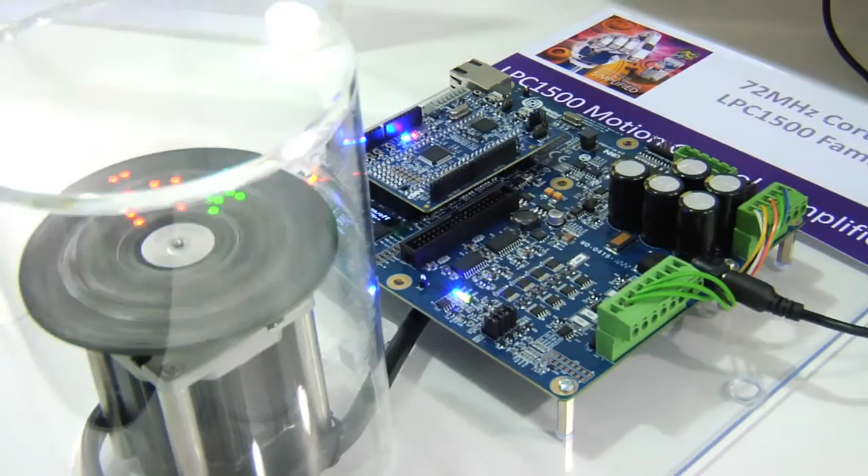We'd like to cover not just the features of the LPC1500, but Mahesh is going to cover some of the motor control work that he's been doing. So we've got a few demos, as you can see at the front. We have the board spinning with the NXP logo. So we have that version, and we also have this flywheel, both using the permanent magnet synchronous motor, but we also have a BLDC solution kit as well.

So the agenda for the presentation: quick introduction from my side. I'll touch on some of the key features on the part that make it specifically good for motor control. Mahesh will go into some more of the technical details, and then I'll cover some of the software and tools and the development platforms that we've got for motor control. Q&A at the end, but if you have any questions as we go through the presentation, just stop us. The more interactive it is, the better it is for us and for you, hopefully.

The 1500 has been designed with a feature set in mind that will drive multiple different motors simultaneously. The other thing Mahesh has created as well, we've got a GUI used to tune the motors. So every individual motor has a different resistance, inductance, so some issues there when it comes to tuning the motor. So Mahesh will talk a bit more about that.

Some of the customers that I've spoken to are in the consumer space, large home appliance, in the commercial space for HVAC, elevator, escalator control, and the heavy-duty industrial pumps and generators, so the AC induction type motors. But the feature set, we have 4 state configurable timer PWM blocks on there, so it means it can drive up to 28 PWMs. We have 2 12-channel, 12-bit ADCs on there, so 24 channels in total. So in total, we could, in theory, drive up to 4 motors simultaneously.

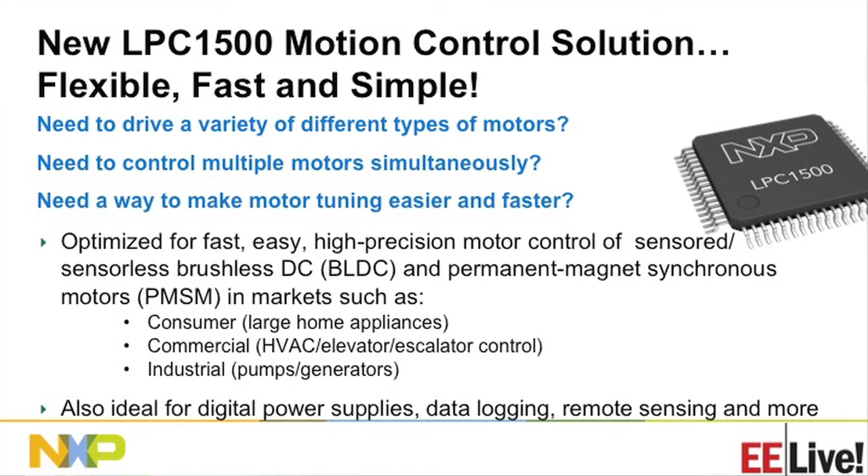So if I take an example of a permanent magnet, this type of motor here does have a QEI sensor in there, the quadrature encoder, I should say, which hooks directly into our QEI interface on the microcontroller. On the sensored side, we connect directly to the QEI. But if we're doing sensorless, we use the ADC and the PWMs. So the ADC can measure the currents in 2 of the phases, and you can determine the position, the direction, and the speed of the motor.

So the firmware, we have our own engineer-to-engineer website called LPCware. Up there, you'll find an app note explaining the brushless DC. There'll be example code that you can download, so it's all there. The key thing about BLDC is the SCTimer PWM block can drive that on its own, so you can actually shut down the CPU core, and the SCTimer will take care of that. So if power consumption is an issue, then you can shut the core down.

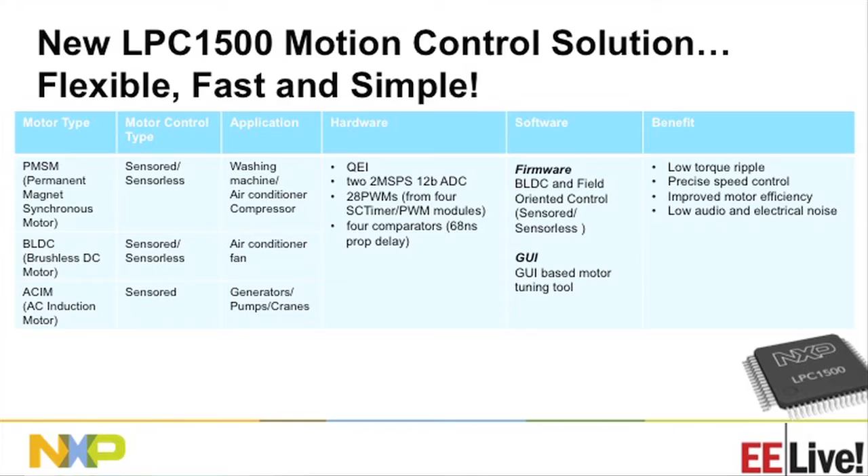But the key thing is the interaction between this SCTimer PWM block, the ADCs, the comparators. So this is all hardwired internally. So to create that control loop, it's very fast, efficient, and the interaction of the comparator and the PWM means if there's an overcurrent condition or an over temperature, then the comparators can shut down the PWMs in a safe way.

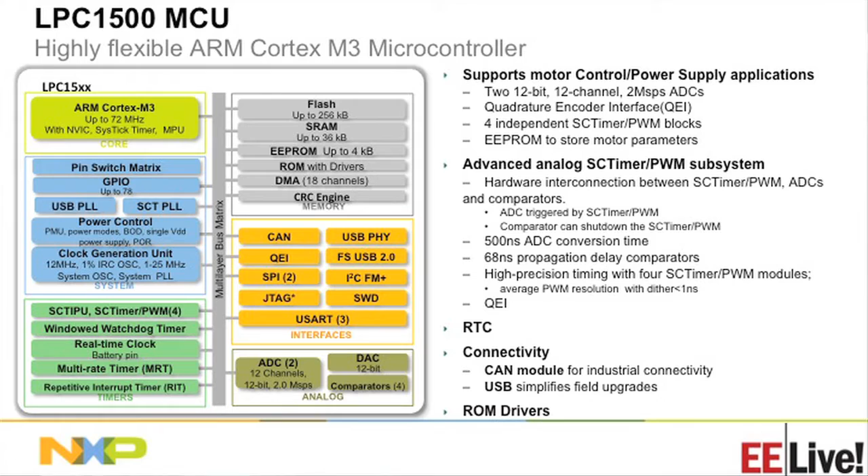But in addition, we do have the communication interfaces. We have CAN on there for the industrial side, and we also have USB if there's any in-field updates or for data logging. And we have all the standard serial communication there as well, SPIs, UARTs, I2Cs.

So one of the key features as well that I never touched on in the block diagram is the pin matrix or the switch matrix. And what it allows you to do is route any function internal to the part out to any pin on the device. So the benefits of this means that every function can get out, and you can use pretty much every pin on the device. There's a few exceptions like the USB and the I2C that are dedicated pads, but everything else can be routed out. So, for example, you can have your UART going to port 0, 2, or 3, or 4. It's up to you how you wish to program it.

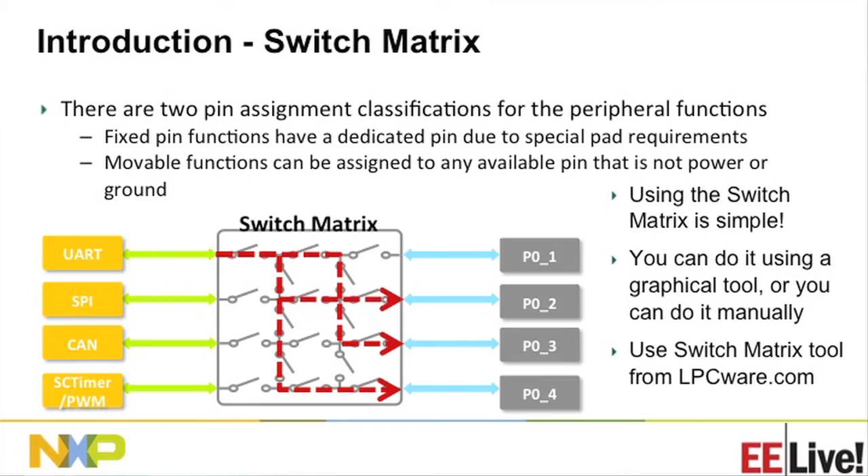So I mentioned the SCTimer PWM block being a specific block dedicated to the timing and the PWM generation. This block's unique to NXP, and what it does is it takes your standard timer, all the input capture, output compare, PWM generation, and you add on a state machine. So the state machine allows you to program various different types of waveforms. It gives you precise edge control over the PWMs. So if you want to create something that's non-standard, then the state machine allows you to do that.

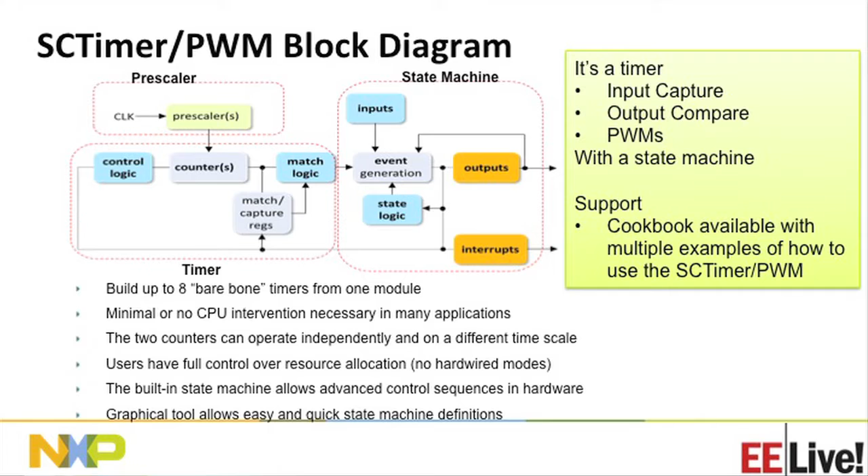We do provide a GUI tool. It's within our own development environment. It's called RedState, and it allows you to program the state machine in the way you specifically want it. But again, these blocks can either be one 32-bit timer or two 16-bit timers. So again, they're flexible. You can have them on two different time domains, and you can program them up and down. And depending on the states and events, you can create different types of waveforms.

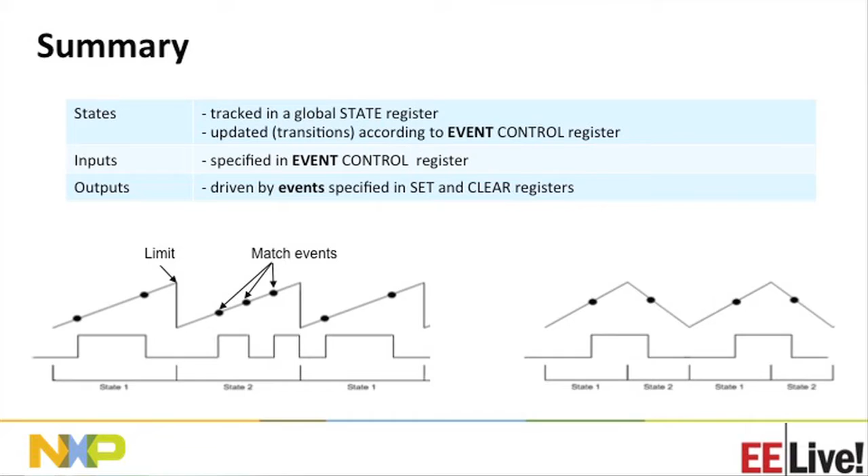Okay, so the ADCs on the device, there's two of them. So the thing to note is it's 2 megasamples per second, so it needs a 50 megahertz clock, but the core itself can run up to 72. So you have various different clock inputs that you can use to drive the ADCs. So it can be the internal oscillator, which runs up to 12 megahertz if you just want to run slow. You've got the system PLL, but obviously there's a limitation to 50 megahertz on the core if you use that. Again, you can use the USB PLL, but you're limited at 48 megahertz. Or you can use the SCT PLL and run it up to 50. And then, you can still have your core running up to 72 megahertz.

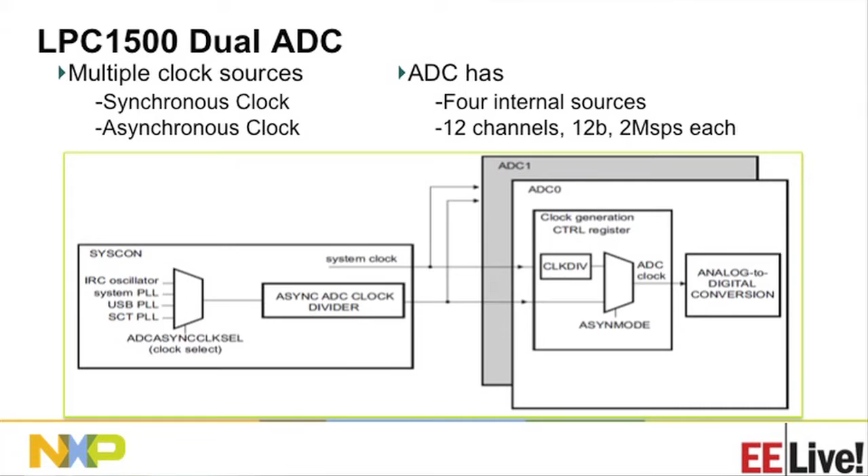So the other thing on the flexibility message about the 1500 is the comparators. So there's up to 7 different inputs that you can route to any of the comparators. Can be on either the positive or the negative inputs. Likewise, the temperature sensor is fed into the comparators as well. So again, if there's an error condition, then it can shut down. And there's 3 different propagation delay settings, depending on power consumption or the speed that you want of the comparator to flip. So that's programmable as well.

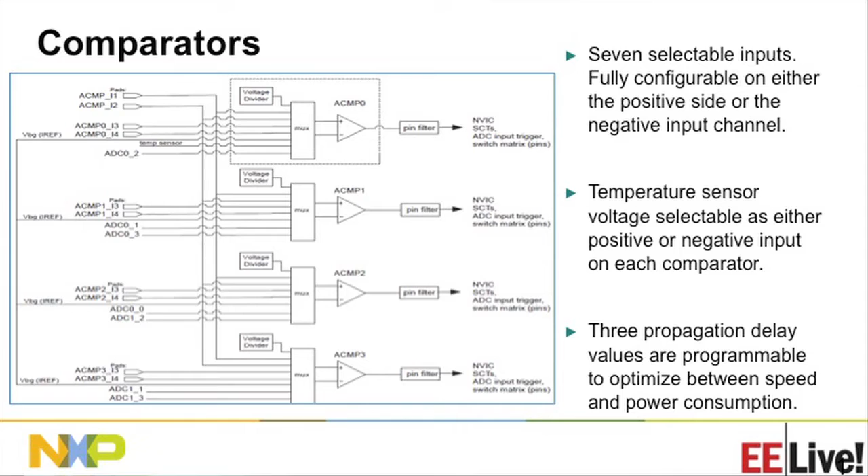The quadrature encoder interface, so depending on the number of output pulses and the phase difference between the pulses, you can determine the speed, the direction and the position of the motor. So that's fed directly on the board here, on the motor control board. The sensor is fed right into one of these blocks and then it's fed straight to the 1500. So the other thing is there's an index input as well, so if you want to reset the position of the sensor input, then you can do that. And then each of those pins is selectable, so you can route it out to any pin on the part.

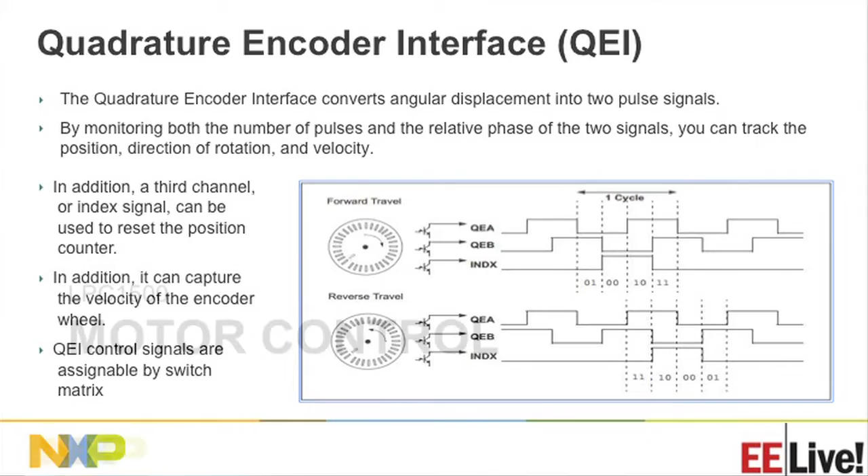Mahesh, I'll let you talk.

So Stephen talked about various peripherals available on this microcontroller for motor control application. One is SCTimer PWM block, which can have up to 28 PWM. 4 sets of independent PWM, minimum 6 each. So in that way you can control up to 4 motors.

There is a lot of interconnectivity between peripherals. There is a connectivity between comparator to SCTimer, ADC to SCTimer, and you have ADC also shutting down SCTimer PWM block. And that way you can control various motors like brushless DC motor, PMSM motor, AC induction motor. You can control definitely stepper motor and brushed motor. So you can control all of the motors using LPC1500.

One of the examples here is LPC1500 controlling 2 motors. One is a PMSM motor and the other one is brushless DC motor. In case of PMSM motor, here it has been shown that we are doing FOC on this motor and it's controlling 2 motors. In case of PMSM motor, the feedback is coming from the QEI.

The overcurrent protection is coming from the SCTimer PWM input processing unit, which can take input and shut down the PWM. And this SCTimer PWM IPU block can be controlled by SCTimer PWM block. So it can control when to take the input and when not to take the input. For example, there is an overshoot and you don't want to take the input. In that case, it can control that SCT IPU block.

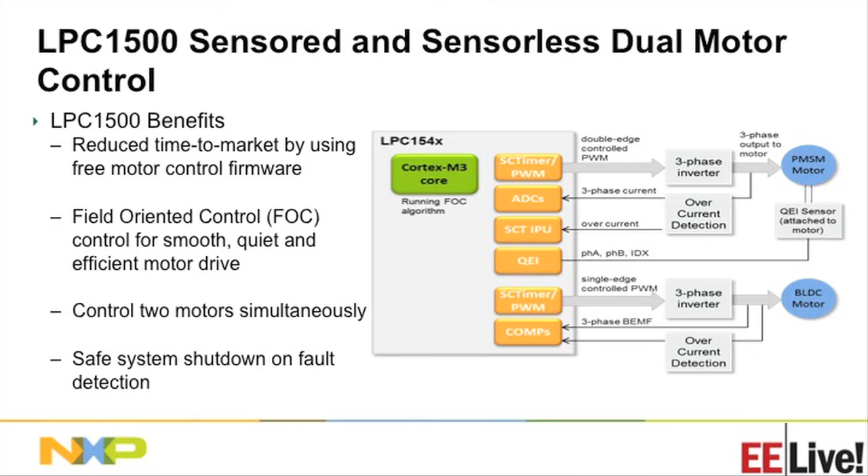The other thing is SCTimer PWM block can take the inputs directly from the pin or directly from other peripheral. In that way, you can directly connect Hall sensor to the input of SCTimer PWM block as an event. So there is an event control block in SCTimer PWM which decides which event needs to be taken and what to be done at a particular event. And this is a compressor control and the fan control, and the typical example is like an air conditioner. So it's the same as what I have shown in the previous slide.

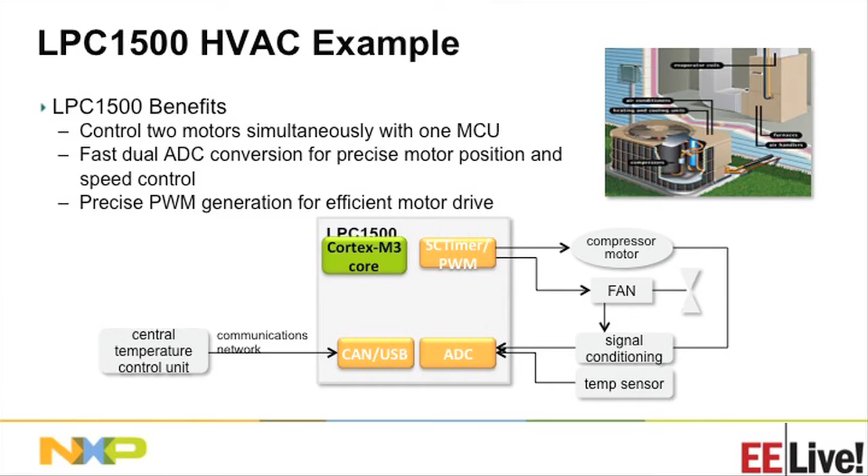So what are the key features in LPC1500 to control motor? For example, if you are doing FOC, you want to control ADC using PWM block so that you can sample ADC at a particular time. So there is a synchronization between ADC and PWM block. Each register has corresponding match reload register. So in PWM block you have match registers and you can generate duty cycle. There are corresponding match reload registers, so there is no glitch when you load the new value of PWM.

It has dual high speed ADCs, so it has 2 ADCs and each ADC is 2 megasamples per second. It has on-chip EEPROM, so you can store the parameters, any tuning parameter from the motor.

It has comparator and ADC, which can directly shut down the PWM block. So for example, in case of ADC, if there is a low threshold and high threshold, it can sense that, and it can shut down the PWM in case of over voltage and under voltage. And a comparator can be used to shut down PWM if there is overcurrent.

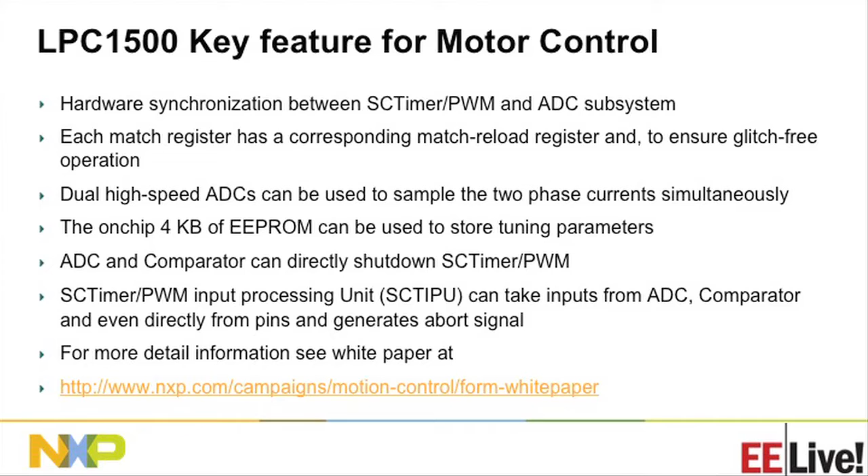The SCT IPU, which is an input processing unit for SCTimer PWM block, and you can control this block using SCTimer PWM block, and you decide whether I want a particular input or not, and it will generate a combined abort input. So for example, multiple inputs are coming, and you want to generate a single abort signal. This SCT IPU does that. You can go to this white paper link if you want more information on this.

So this shows the connectivity between various peripherals in LPC1500. So you can see there is one SCTimer PWM block, another SCTimer PWM block, another SCTimer PWM, and the last fourth SCTimer PWM block. So there are 4 independent SCTimer PWM blocks, each connected to SCTimer, and all timer blocks are also connected to the comparator output. So for example, if there is a fault condition, you can directly shut down the PWM from the comparator. That input can also go to SCTimer, and there are more inputs coming, so you can combine and shut down the PWM block.

This SCTimer PWM can trigger ADC here, and this block can trigger ADC, both of the ADCs independently, or can trigger both ADCs at the same time. So in that way, you can decide when you want to sample the signal. So the typical example could be FOC. If you are doing FOC in PMSM motor, and you want to sample one phase and the other phase at the same time, you can trigger using SCTimer PWM block.

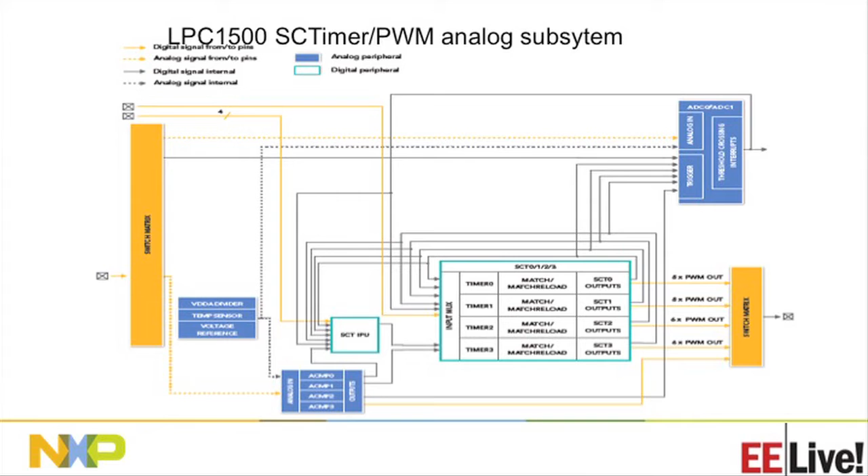And there are 4 blocks, and there are 2 large and 2 small blocks. The large block has up to 8 PWM each, and the small block has 6 PWM each. You have 28 PWM here, and you can control 4 motors using this LPC1500.

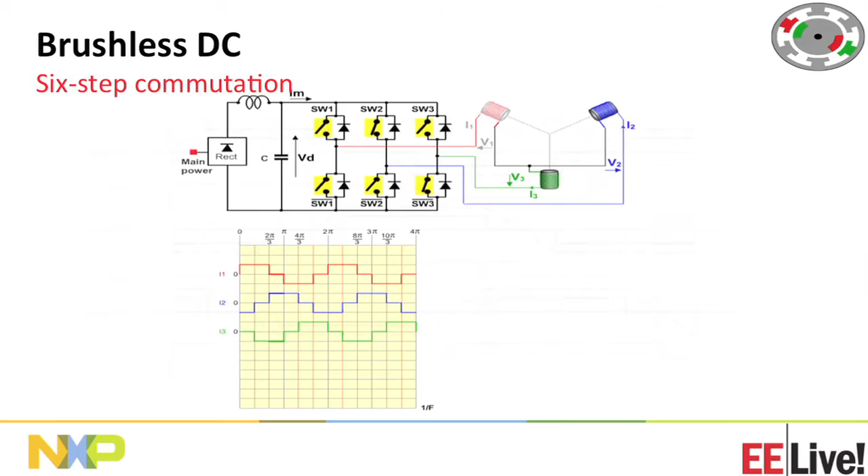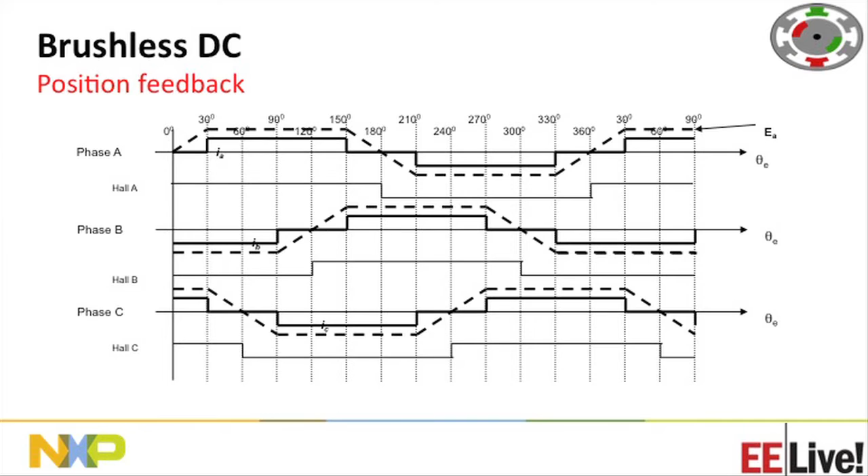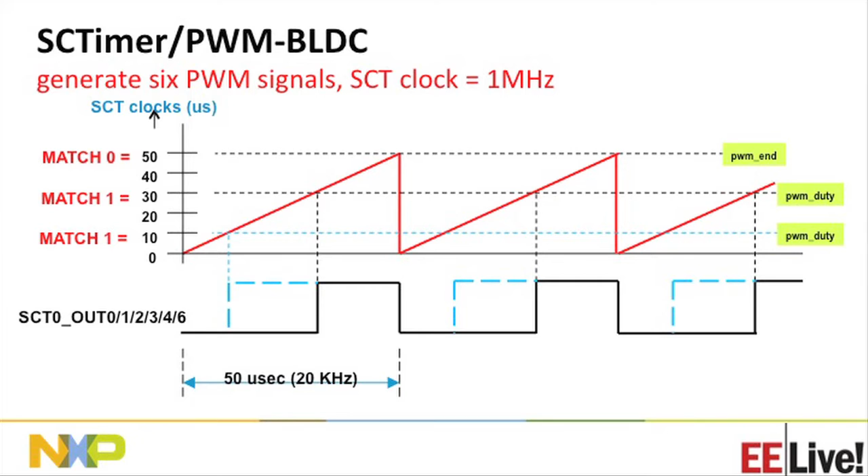And this one shows the SCTimer PWM block generating a PWM, and in this particular register match 0 is actually generating the period, and match 1 is generating the PWM width. So you have 6 phases, and at a time 2 transistors are conducting, but they are actually in PWM. Here you have PWM, you have PWM, then the other one, and that way you have 6 sequences. But each transistor will have a PWM at that time.

So the event is directly coming to the SCTimer PWM block without any software intervention, and it's changing the state continuously from one to the other. So this is totally happening in the hardware. So in this case, you can actually put the core in sleep. So this one shows in each phase you have a PWM duty cycle, which is generated by match 0 and match 1. The period is generated by match 0, and match 1 is generating the duty cycle.

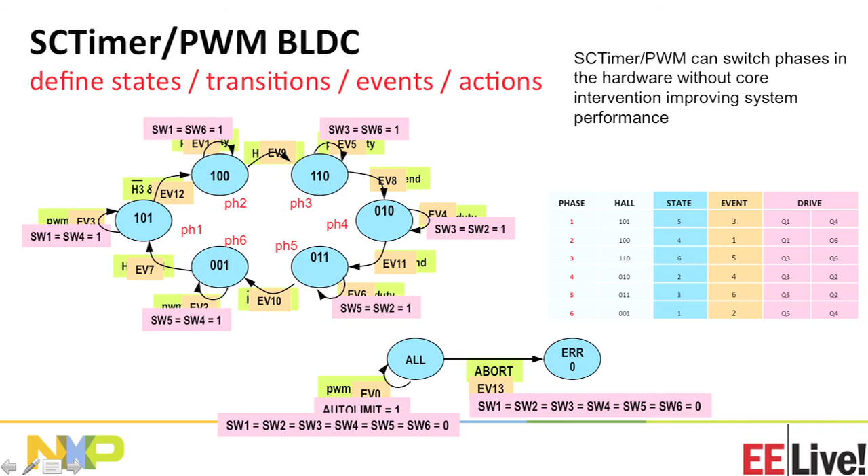So this one shows the abort condition as well. And you have comparator there, you have ADC input. So whenever there is a fault condition, it will shut down the PWM, because those inputs are directly connected to the SCTimer PWM input. So pins are connected, internally peripherals like ADC is connected, comparator is connected, SCT IPU is connected. So all those peripherals can shut down the PWM when required.

Now PMSM motor: this particular presentation is talking about the FOC, how to do FOC on PMSM motor using LPC1500. So LPC1500 has 2 ADCs. It has SCTimer PWM blocks. It has comparator, and they are also interconnected. One of the requirements of FOC is to sample phase current simultaneously. And there are other requirements for safety, like you need a comparator, you need some under voltage, over voltage control to shut down the PWM. All those are available in LPC1500.

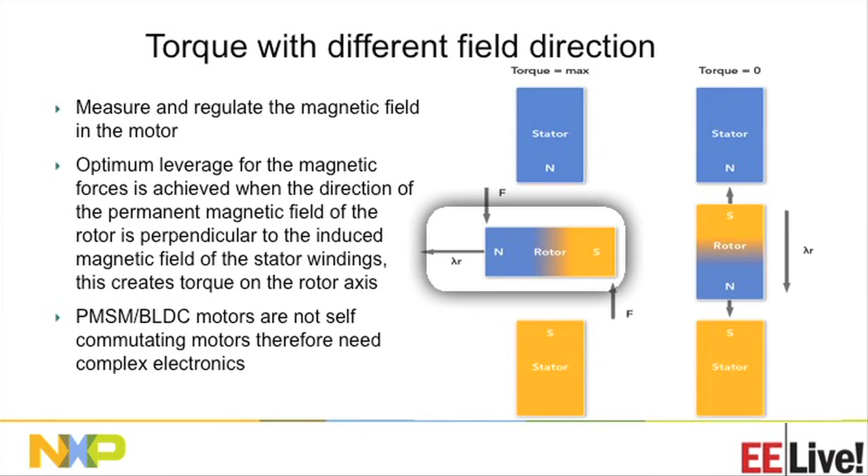And then you can have an arbitrary vector where you can say that, okay, at this particular moment the flux is actually in this direction, and you can have the direct and quadrature. You can have two components of the flux, and then you want to put the quadrature one maximum, and the parallel one 0. So parallel to rotor you want to make 0, and perpendicular you want to make maximum. So that is the principle of the FOC.

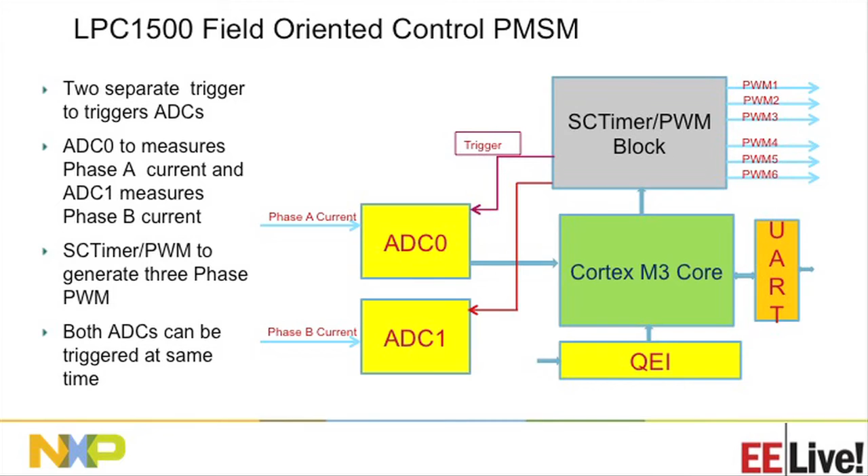And using LPC1500, you can sense the current, like phase A current or phase B current, simultaneously using ADC 0 and ADC 1. And from here, you know the current, then you can have Clarke and Park transformation. From there, you can have a space vector, and you can calculate the PWM values, and you can have SCTimer PWM programmed with the PWM values, and then you can generate PWM.

So ADC 0 you can use to measure the phase A current, and ADC 1 you can use to measure the phase B current. And based on that, you can control the quadrature current and quadrature flux and the direct flux. You want to always make the direct flux 0 and the quadrature flux maximum to produce maximum torque, because you have mu B sine theta from where you can generate the maximum torque.

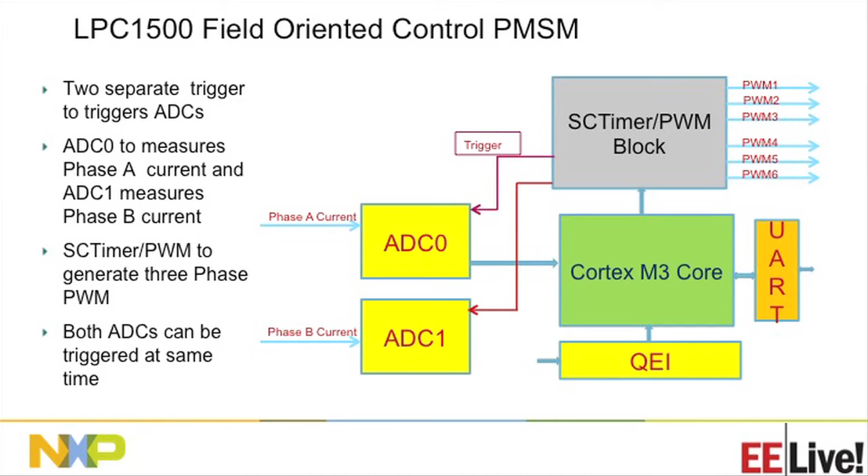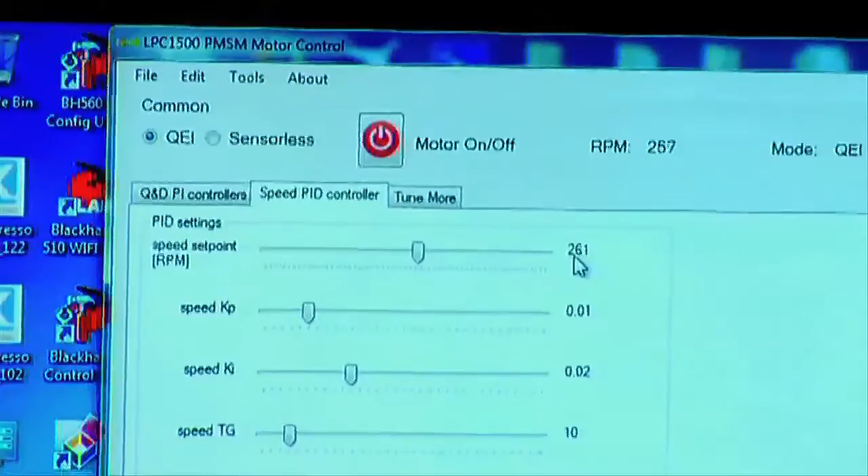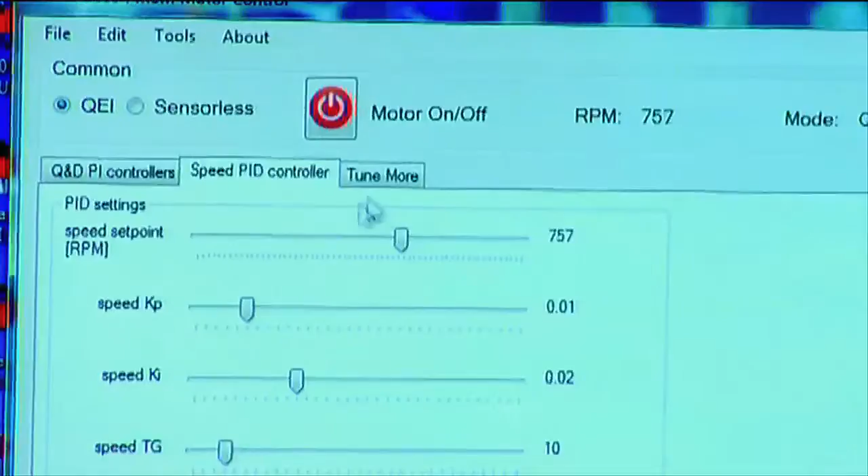I have a motor here, and this one is using FOC control, and you can see that this motor is rotating at a particular speed. We have a set speed here which is 261, and the RPM, which is the actual speed coming from the motor. So you have a QEI sensor here, the mode is QEI, and the RPM right now is 263, it's varying a little. You can change the speed. So the motor will rotate faster. Set speed and the actual speed, they are almost the same here.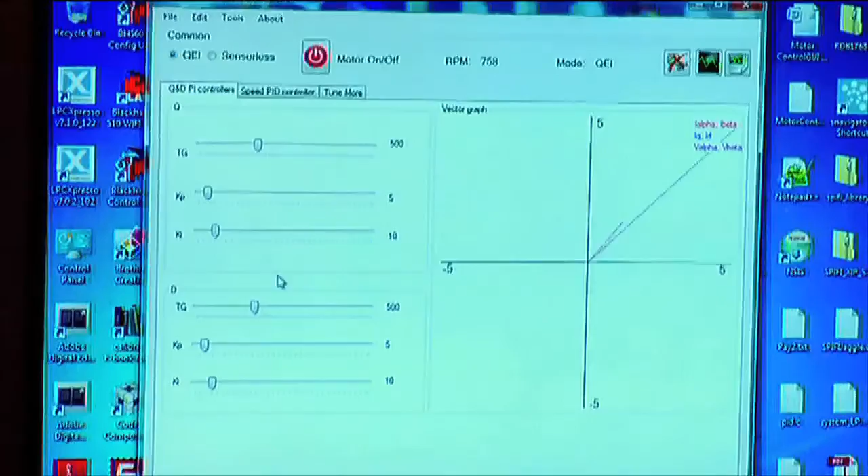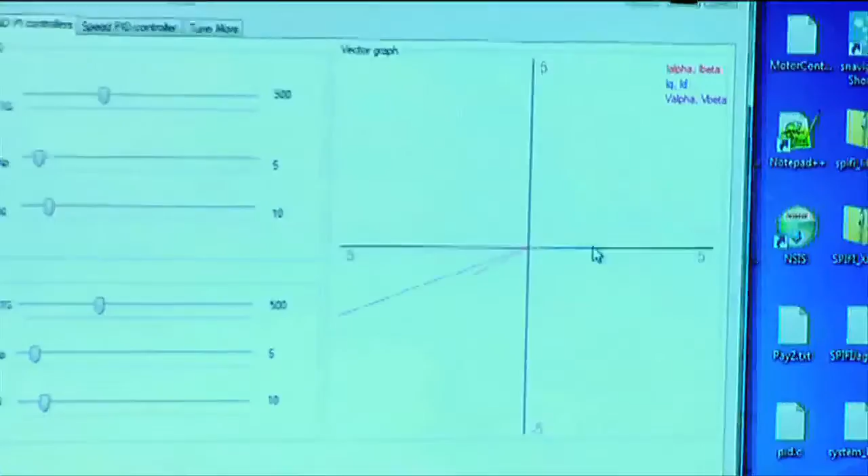You can tune the motor using Kp, Ki and TG value changes. The inner loop, which is the direct flux and the quadrature flux control, is actually done with all these 6 parameters, 3 for Q and 3 for D. This is the rotating vector, and this one is the constant vector, which is required in case of the FOC. So your motor is rotating, your flux is also rotating. So the calculations are very difficult when the motor goes fast. So you want to be in the rotor reference frame, and then calculate the PID loop.

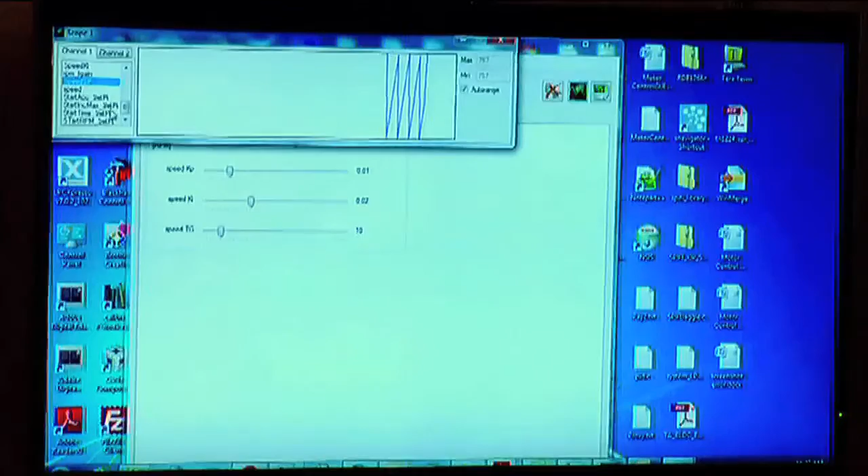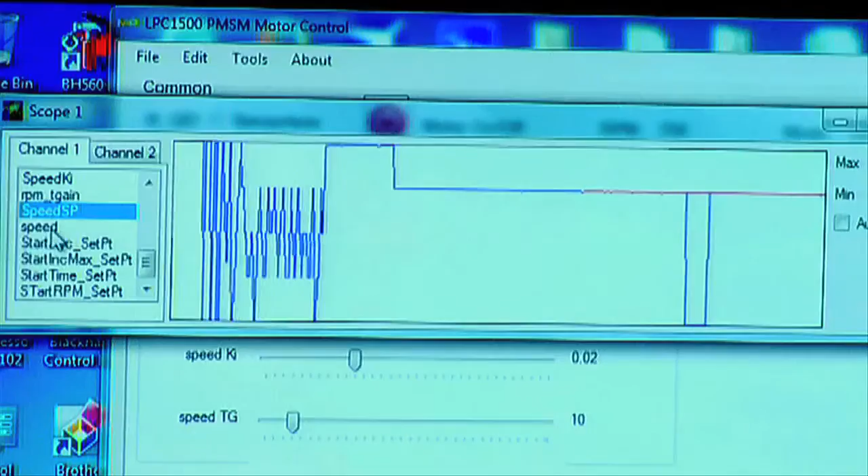So this particular GUI has some features. One of them is the oscilloscope feature, and it will show you the auto range. You can change auto range to a particular value. So you have a set speed and you have an actual speed, which is the speed the motor is running. I can change speed from here. So you see the blue is the set speed and the red is the actual speed, which is following the set speed. So this is one of the features of this GUI.

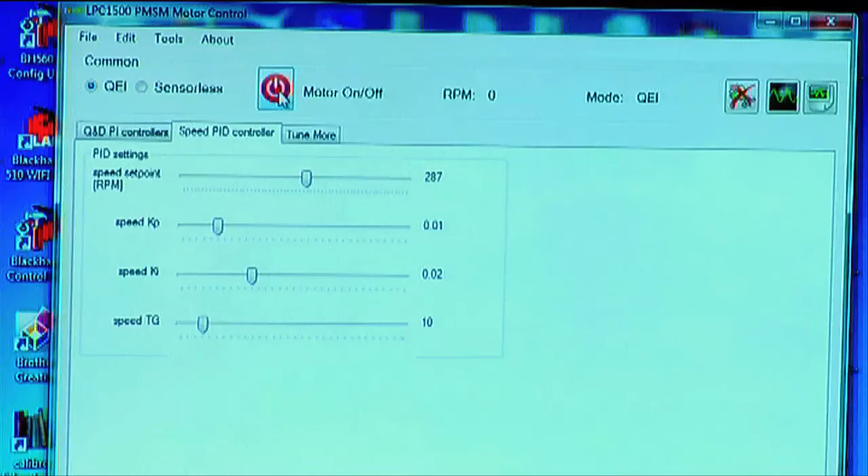You can tune various parameters from here. You can turn off the motor. So now I turn off the motor and it's off. It turned on.

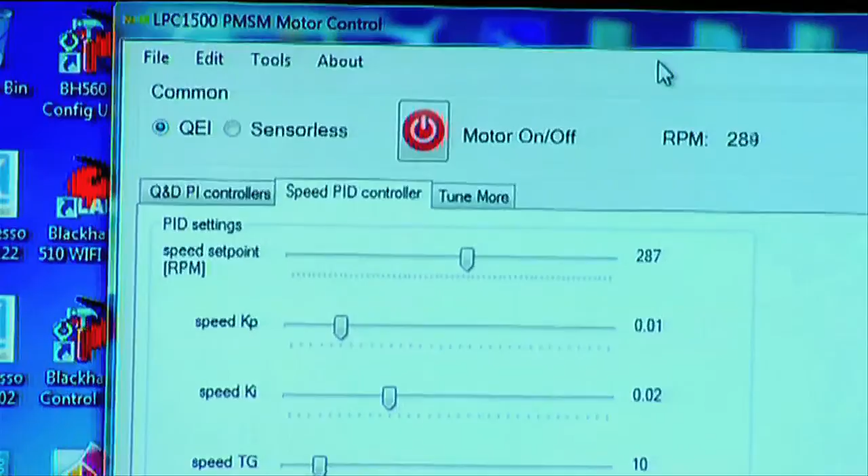There is a data logger as well. You can log the data. So here the tool will show all these things, the scope and the data logger, and you can also save the file into your PC, the parameter file, and then you can use them later.

You can change the motor speed. You can also tune the motor using the KP, KI, TG. This one is tuned for this particular load. So you can use this GUI to tune for your load.

In summary, we can say that in LPC1500 we have 2 ADCs and we have the SCTimer PWM block. And there is connectivity between the SCTimer PWM block which can be used to control a BLDC motor, PMSM motor, or AC induction motor, and definitely the brush DC motor and the stepper motor.

You can control up to 4 BLDC motors independently without any software intervention, because everything is happening in the hardware, in the state machine. And you need software intervention only if you are using some PID calculations in your application.

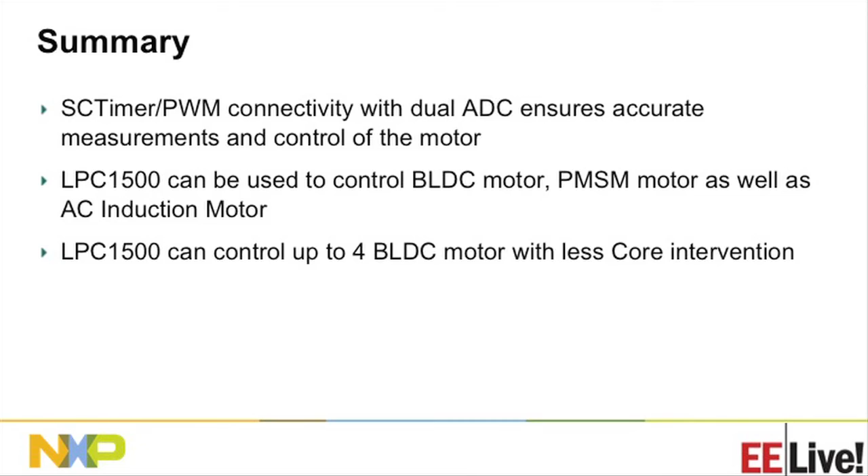That's it from my side. Steve will talk about more. Okay, thanks Mahesh.

Okay, so another quick section just on tools and software that's available. So it's not all about just getting the silicon. We want to try and help to make things easy when you're developing. So we've got some software wrapped around it.

So as I mentioned before, we have our engineer-to-engineer site, LPCware. And on there we do have LPC Open that you can download. That's initialization drivers, low-level driver support there. So it's a standard platform. We develop all of our code internally based on the LPC Open platform. It means that we have lots of reuse, and I'm sure that's important with all your projects as well.

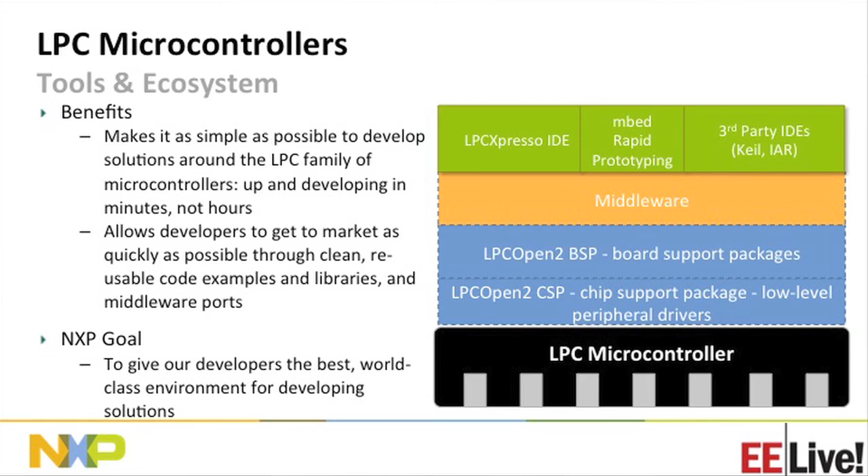On top of that, we do have board support packages. So we have the LPCXpresso board. We also have a Keil board that we use as well. So those board support packages are available. On top of that, we have middleware. So we have drivers, stacks for USB and for CAN, which is on this part. And then we do have our own IDE, the LPCXpresso. We support mbed for prototyping, and then we do work with Keil and IAR as third parties.

But the key thing to point out on this is this part is 256K flash. So the tools, you get a download limit of 256K, so basically the tools are free. $30 is the charge of this board, but everybody will get a free board anyway, so development is free basically for you on this. If you do need the full support package, then the Pro Edition is less than $500, so it's pretty cheap when you look at it as a whole development environment.

We do have 2 solution boards, solution packages. So this one, the permanent magnet, and the brushless DC version, which we've got here. So we do have both those solutions. The base board is the same. It has the LPCXpresso that plugs into the motor drive. The thing to point out is the drive itself can only drive up to 24 watts. So obviously if your application's bigger than that, then the drive circuitry would have to change.

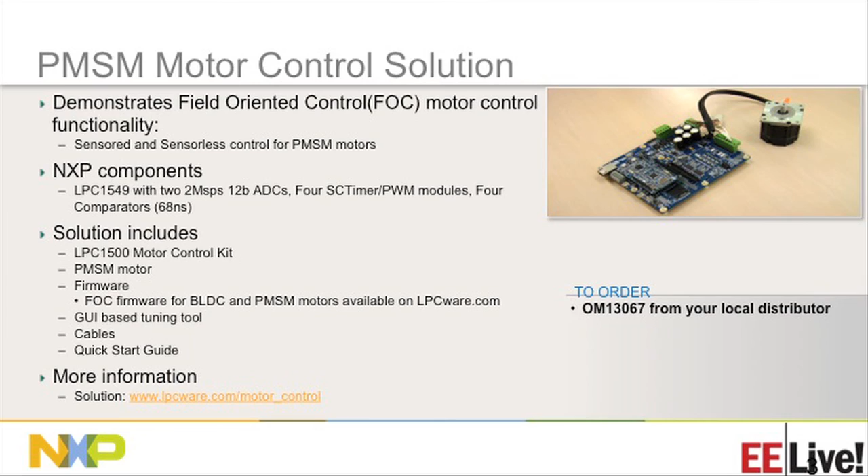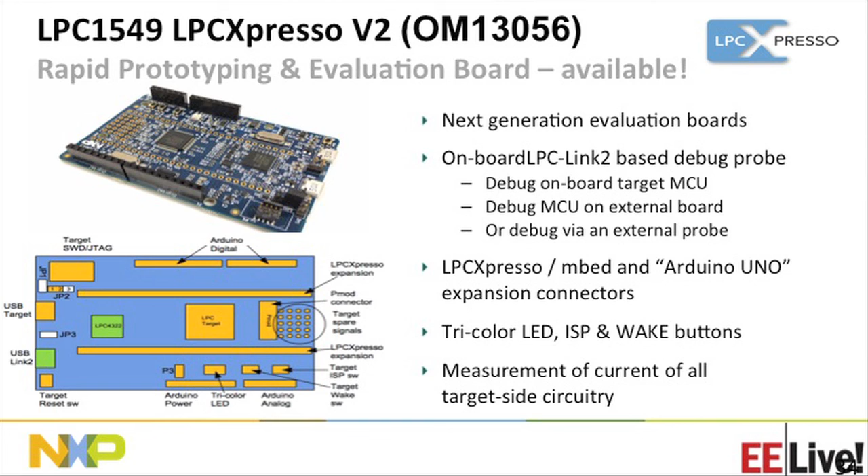Same there. So the LPCXpresso board, the key thing about this is it's a new version of this board. So what you do get on here is a debugger as well. So you can debug the target, the 1500, or if you've got any other device that you want to debug, you can use this as well. So there's no need for a hardware debugger. It does support Arduino. So if you want to plug in some other cards, then you can plug in the Arduino. It's also got PMod for the mbed. So it's a pretty flexible little board.

So the key places for information if you're looking for anything else on the 1500, NXP.com and LPCware.com are the 2 places to go.

And then just to finish up, a quick summary. So the 1500 can drive various different types of motors, brushless DC, permanent magnet, AC induction, drive multiple motors at one time, so hopefully saving you system cost in your own design. Sensored and sensorless control, so we've got the QEI for sensored and the ADCs for the sensorless. We've got the GUI, we've got the demo code, we've got the FOC. That PID loop is only something like 11K of flash, so it'll run in any of the versions of the 1500, and it runs in about 40 microseconds.

The key thing to remember is the interconnection between the SCTimer PWM, the ADC, and the comparators, creating that tight control loop. And if you look at the pricing compared to the competition, I think you'll find that we're pretty competitive, so it's a pretty cost-effective solution.